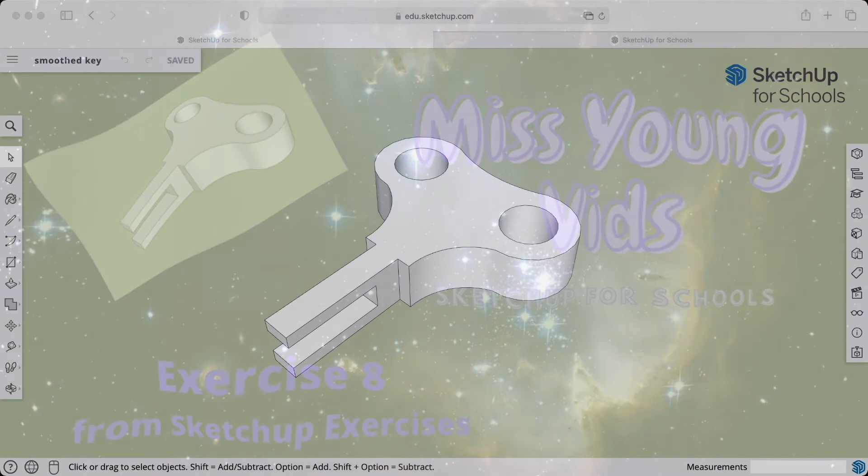In this video we are going to be drawing this shape, which is kind of like a key shape, and there are some really cool things about drawing this shape that we're going to learn. We're going to use some tools we've used before, such as the rectangle, push-pull and tape measure, but we're also going to learn about arcs and using arcs to create different shapes and curves, and we're going to use the smoothing tool to get rid of lines. Where the curves meet, there would normally be a line, but we're going to smooth that out so we don't see it anymore, and we'll do that up around here as well. So this is the shape we're going to be drawing.

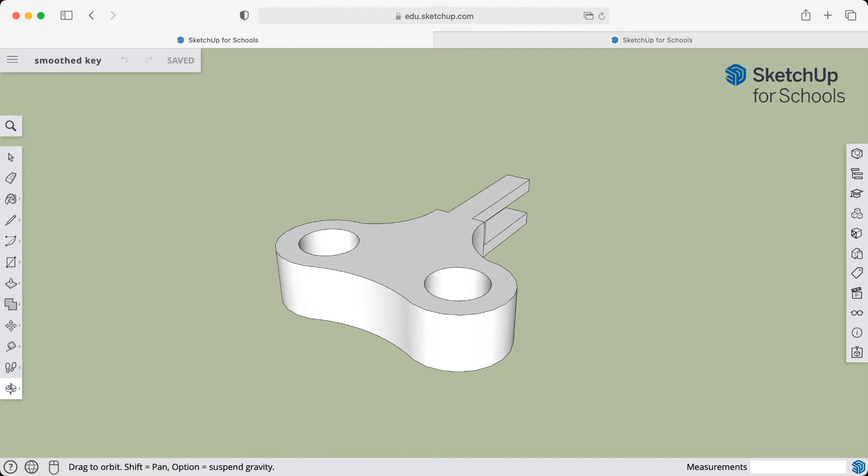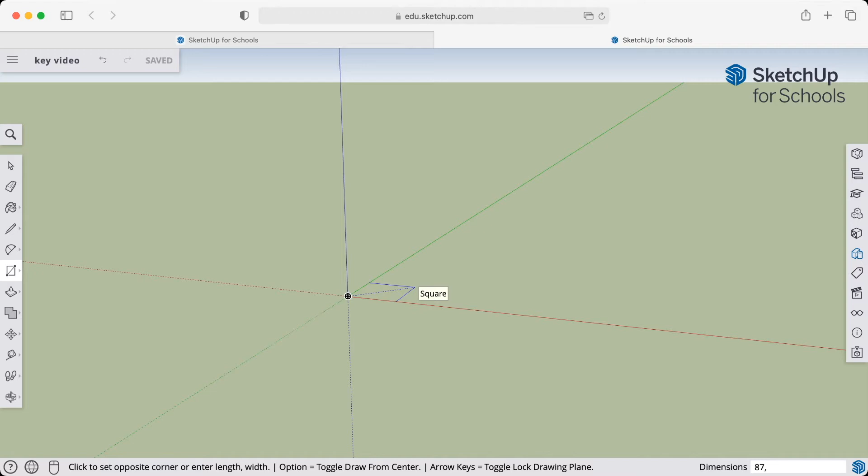I'm going to start with a rectangle, with dimensions of 87 and 50. So I'm just going to draw that out - 87, 50. I've already zoomed in, probably a little too far, so let's zoom out again and swing around.

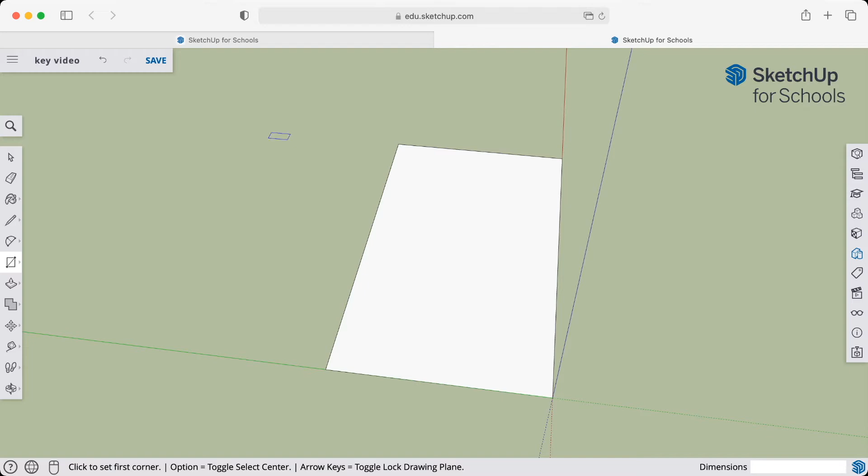So now we've got our rectangle. At the one end, I'm just going to choose this end up here. We're going to add the curvy bits of our key, and we're going to use a brand new tool, one we haven't used in any of our videos before - the arcs tool. So one of the arc tools.

So we have up here just a general arc tool. We have a 2-point arc, which we will use eventually as well. The 3-point arc, which we're not going to use today. And the pie - now the pie is the one we're going to use first.

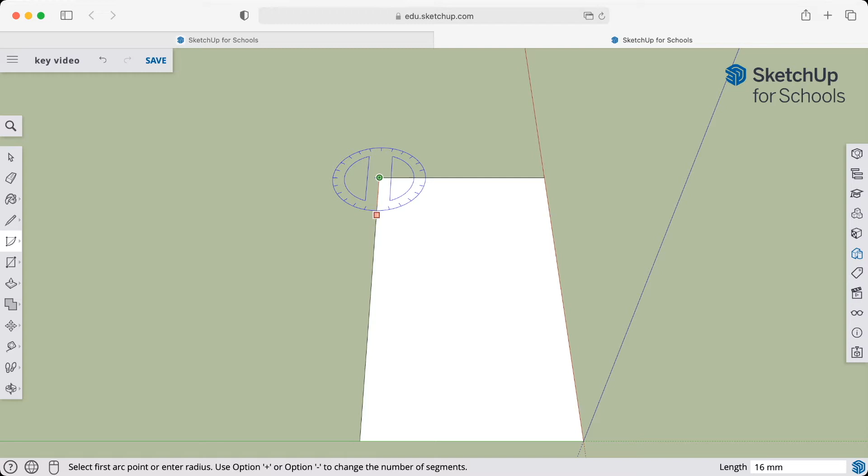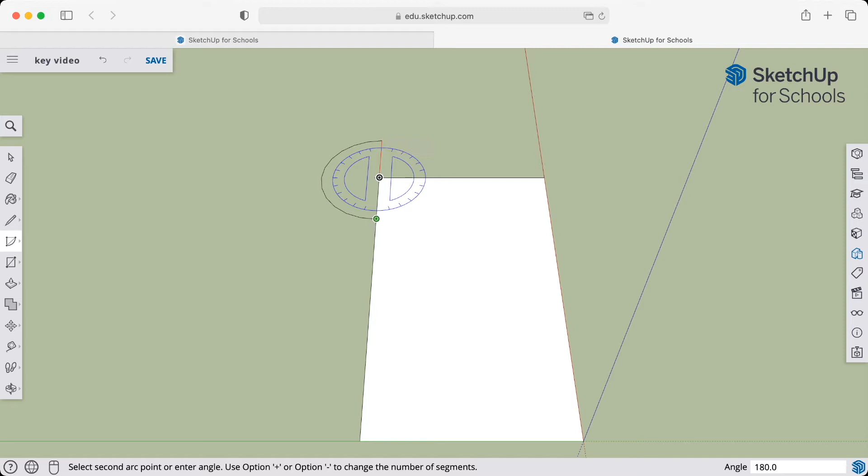So I'm going to click that, and over here on the corner, I'm going to click once to set it. I'm going to bring it down here. Now I need this to have a radius of 17.5, so I'll type in 17.5 and hit enter, and then drag it around. Now I don't want to go straight up because that's 180 degrees - I actually just want to go one section on that protractor further than that. So there's 180 degrees, you can see I'm lined up with the red axis, I want to go one further in, and it fills it in just nicely. So this is the pie.

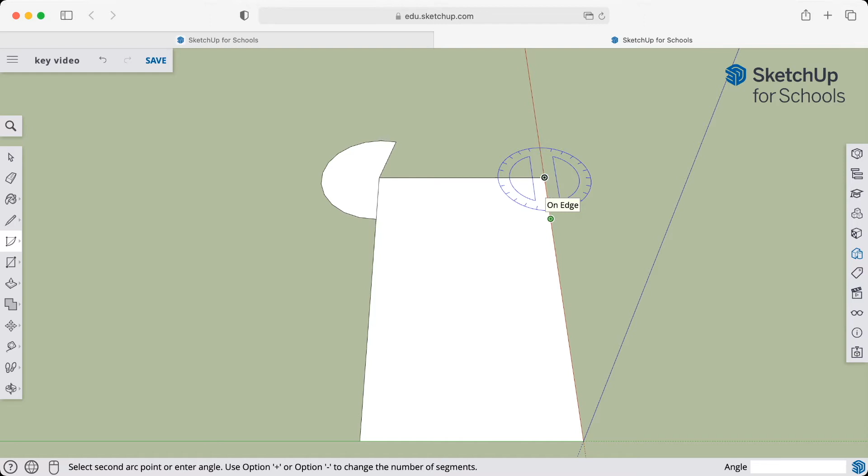I'm going to do that on the other side as well. So again, just clicking on that corner, drag down 17.5, enter, drag that around, one past the 180 degrees. Now we've got something that looks kind of like bull's horns - okay, that's exactly what we want to get started.

And now we've used a different arc tool - that's the pie arc tool. You can set how big you want the radius for that one, and then you can set angles and use the protractor if you need to.

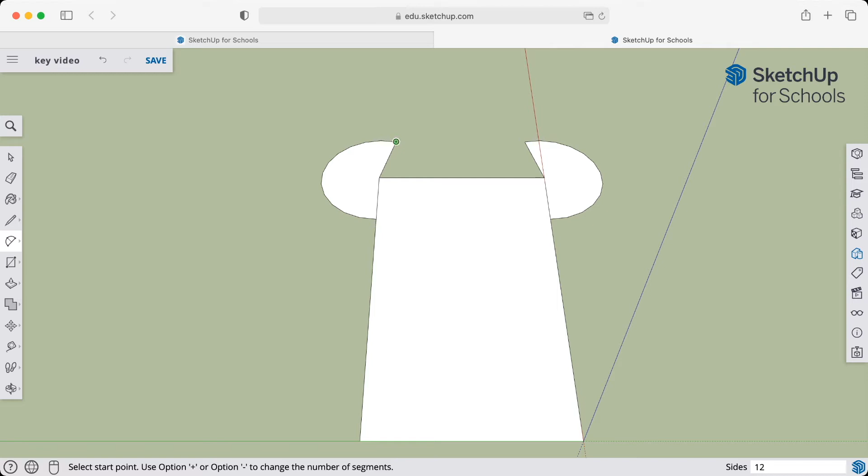But now I need to add this little curve up here that goes the opposite way to the other two. So for this one, I'm going to use my 2-point arc, and there's a little trick with the 2-point arc. I'm going to click on this end, click on that end, come to the middle and drag it down a little bit and click, and you can see that's filled that in nicely.

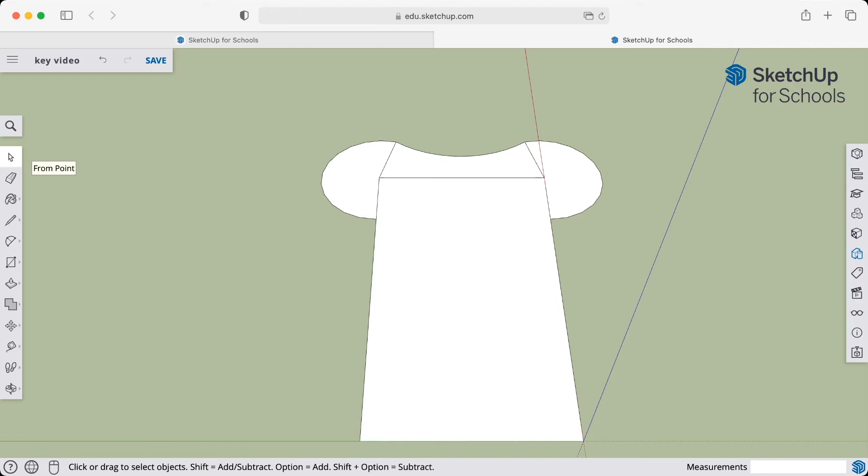But I actually want a particular measurement for this arc - I want a particular radius, and I want that radius to be 50. So I'm going to get my cursor to select that arc, and hopefully you can see it's gone blue. If I select the line, it goes blue. I want that blue, then entity info, and you can see this particular arc has a radius of 33 millimeters. Well, I don't want it to be 33 millimeters, I want it to be 50. So I'm going to type in 50 and hit enter, and you can see it actually changed how the arc looks.

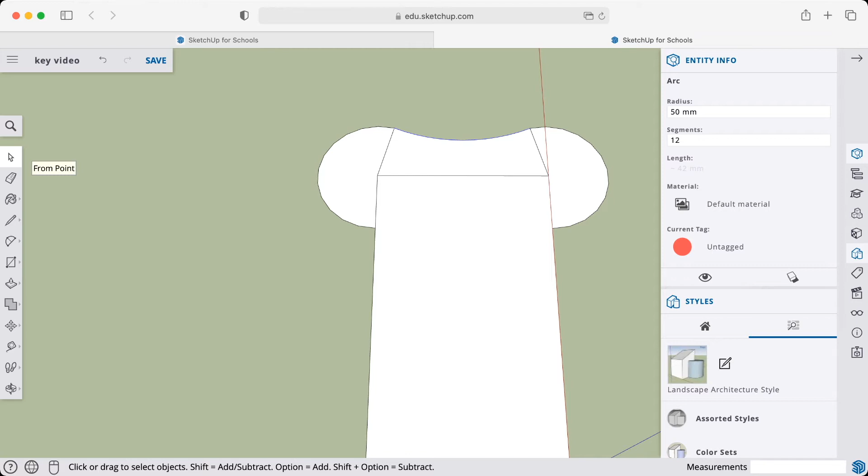We're not currently worrying about how many segments, but we are worrying about that radius. So now I've got that arc in there, and I'm going to get rid of all the extra bits of line that I don't need anymore.

So that's the top part of my key, pretty well done. Now to focus on this bottom end, down here. You can see we've got some curves, a lip there, and a section that's a bit missing. So let's get in and do this one.

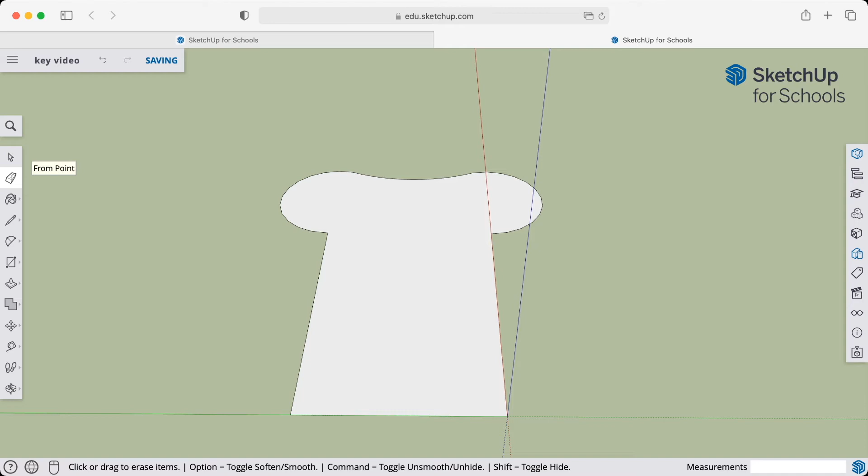Alrighty, measuring tape. Down here I want a section dead center that is 10 millimeters wide. I'm going to come across here, and take 10 off 50 because that's how wide this rectangle is. Take 10 off 50, I get 40. Split that difference, I get 20. So the two edges need to be 20 in.

And then I can either come from this corner and do 20, or I can just go from that guide point and go 10. So from there to there, we've got 10, and from there to there, we've got 20 again.

Now, in to here, where that little lip was, is 45. So I want to go from one of the corners up 45. And I've got my guide points. Now, don't worry about those guide points. We are going to get rid of those later on, right when we're finished, and we don't need them anymore. But for now, we can have them in there.

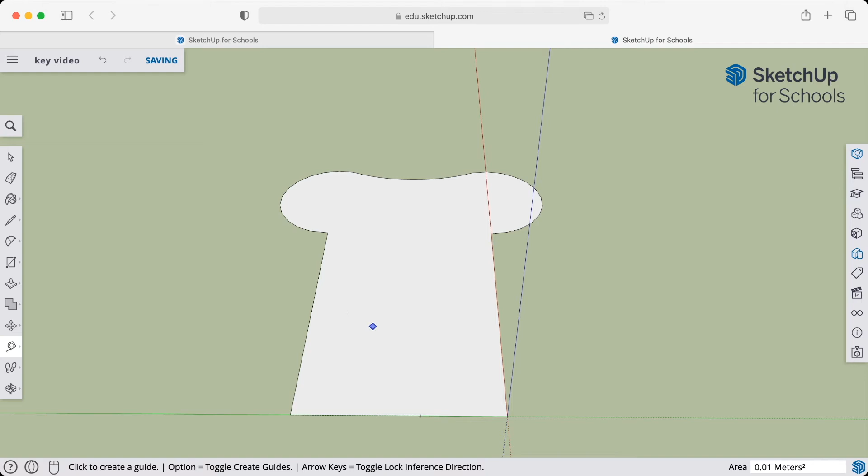They're very helpful. Get my pencil tool so I can draw a line. I'm going to keep this on the green axis to keep it perpendicular. Then these bad boys will stay on the red axis for the same reason.

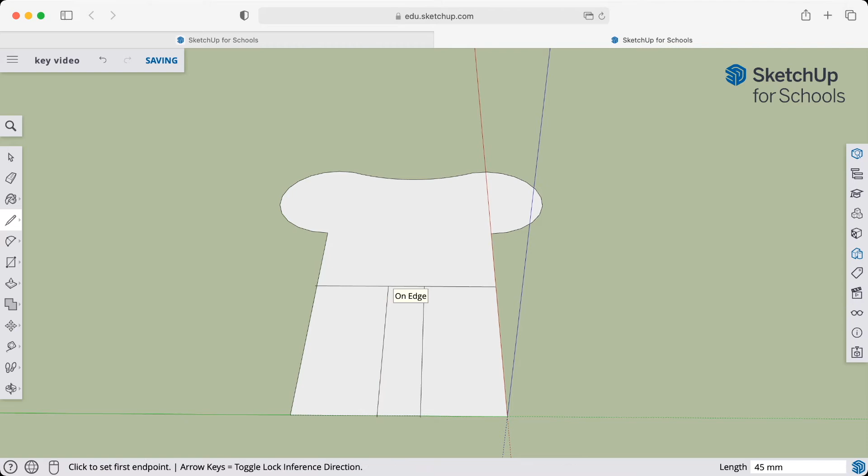And then I don't need any of that anymore, so I can get rid of those lines. I can also get rid of this bit in here. Next bit, we need to get the arc that comes into here, but we also need the lip.

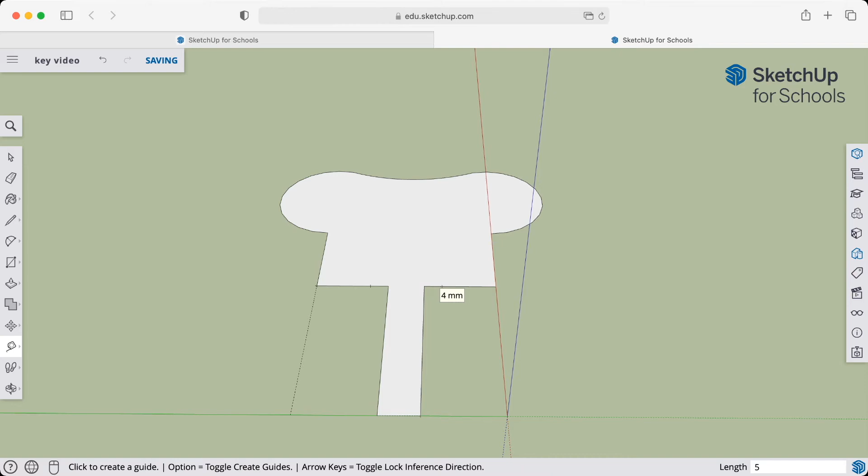Now the lip will come 5 mil off the corners here. So that'll be 5, and this one will be 5. So the actual width of the lip from one side to the other will be 20. We just go 5 out, and then we've got that 10 in the middle.

Alright, we're going to use that 2-point arc again. So another chance to use the 2-point arc, seeing it there. And the points are going to be this corner and the guide point. So I'm going to go corner, guide point in.

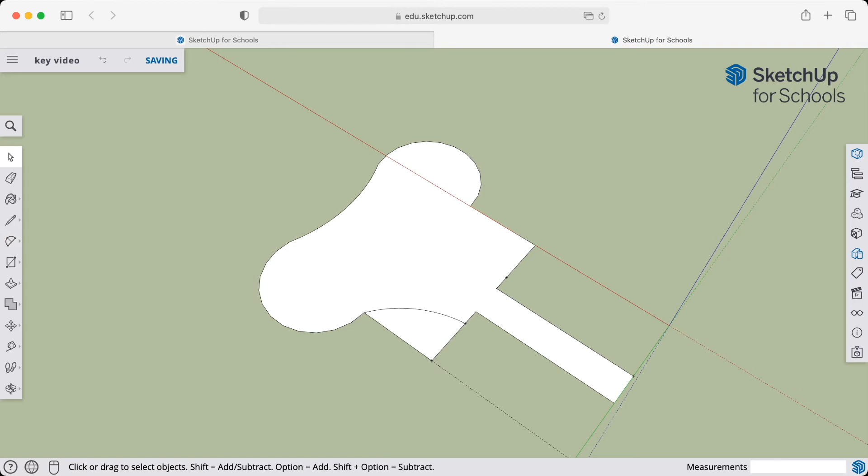I'm going to select that arc, entity info, and for these ones I want these ones to have a radius of 25. And you can see how it changes that arc.

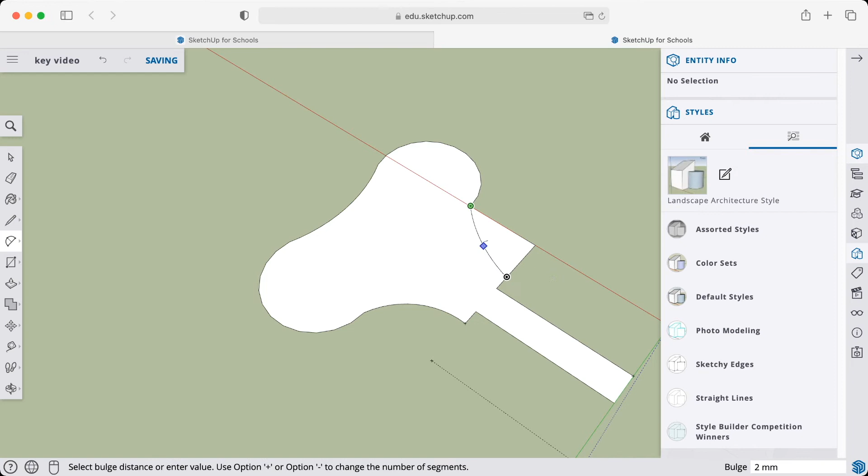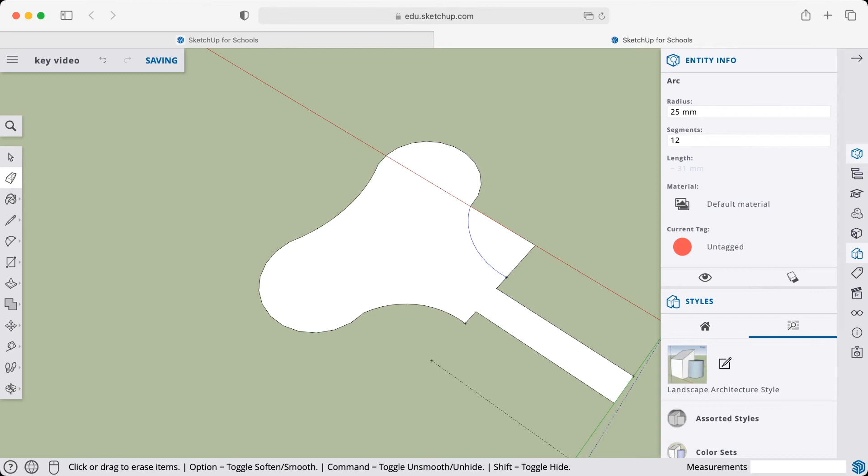I can get rid of the excess bits, and I can do it the same on the other side. Corner, guide point, pull in, select, change that to 25. Remove the unwanted sections.

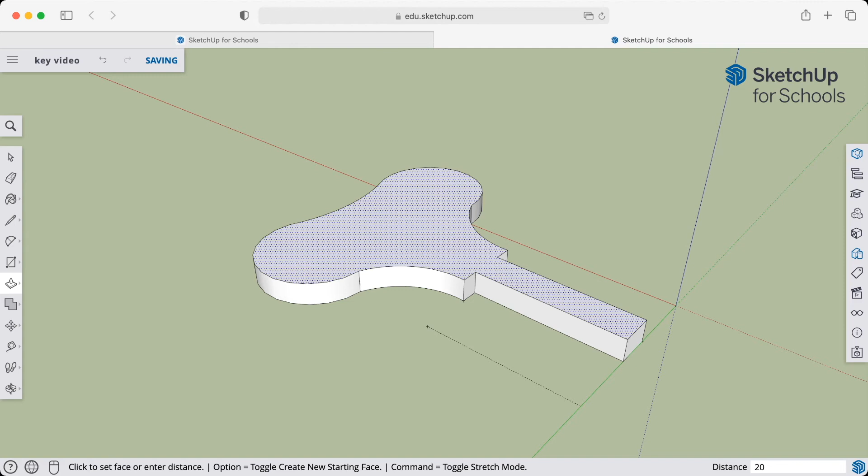Now I want the thickness of my key to be 20 mil. So back to the old push-pull. Drag that up 20. And we've got a pretty good looking key starting to form.

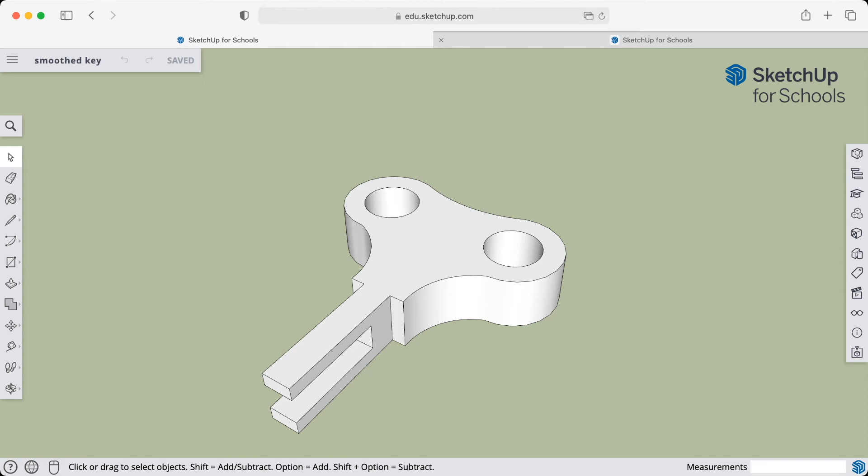So we've got our thickness. We've got the top bit pretty well in. All we have to do now is create this gap, and then our circles there, our holes, and we'll be done, except for getting rid of the guides and smoothing things out. So you can see there's that line. There's no line in this one.

Now the gap is 10 mils, but this is 20. So if I go up 5, and then go up another 10 - so I go up 5, and then up from that guide point 10 - and then it's only 35 deep, that gap.

So again, we're going to follow those axes. This time we're going to follow the blue axis and the red axis.

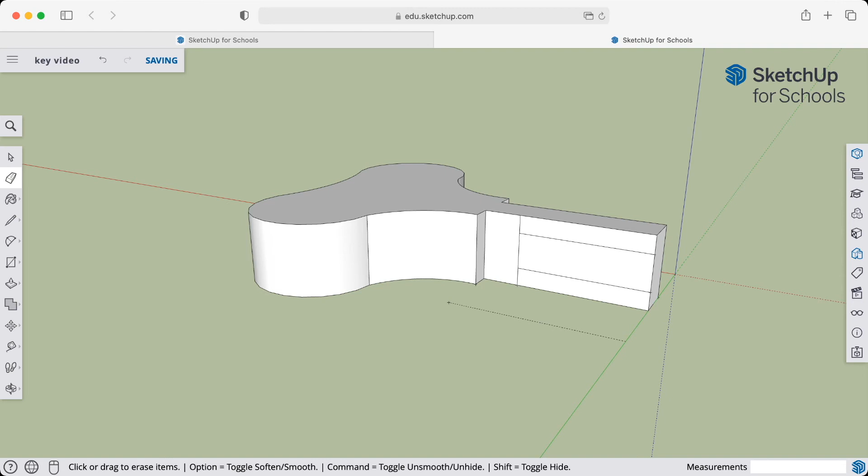Get rid of any additional lines. And then, as we've done in previous videos, push in, click on the edge, and we don't have that section in there anymore. We've got our gap, and the gap's in there really nicely.

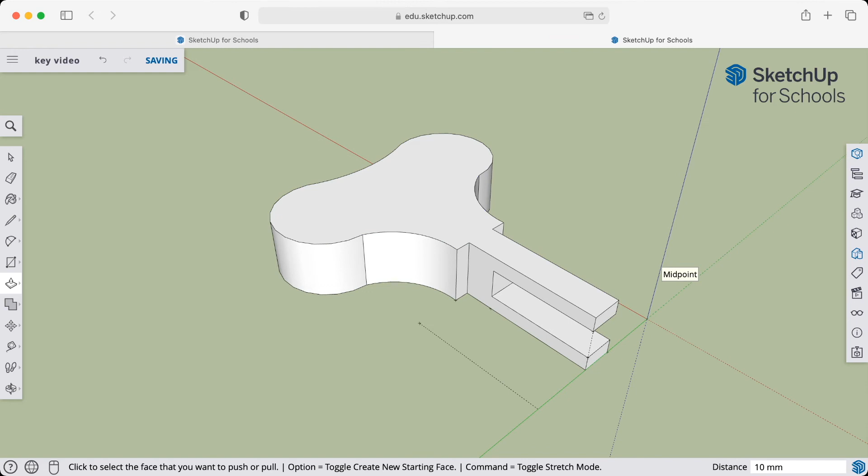Now for the circles, the holes up here, I'm not going to draw any guidelines to find the center this time. I'm actually going to use inferencing, which is where SketchUp will essentially guess what we want it to do.

So I'm going to get my circle tool and just sit it on the edge here of the big arc. Then if I drag in, it snaps to the center of that circle, telling me exactly where I want the center of my next circle to be, which is a radius of 10.

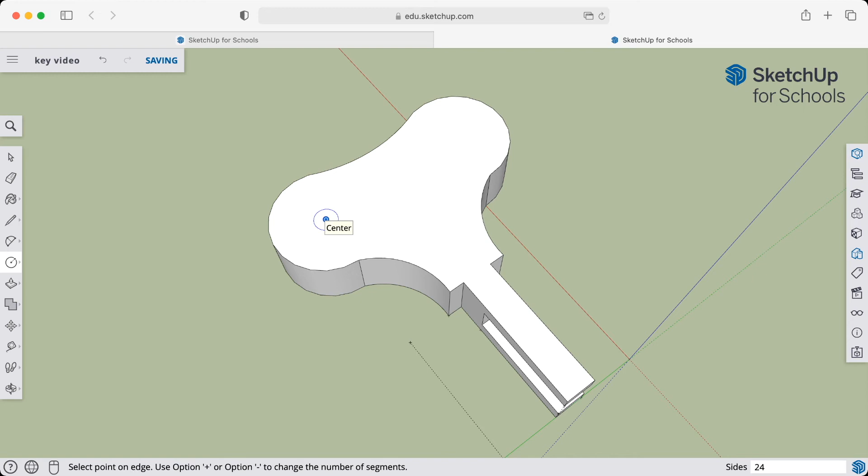And there it is. I didn't have to draw any guidelines for this one, and I don't have to erase any extra bits and pieces, just by using the inferencing. I can do the same over here - just on the edge, anywhere on the edge, drag in towards where you think the center is, and it'll snap there for you.

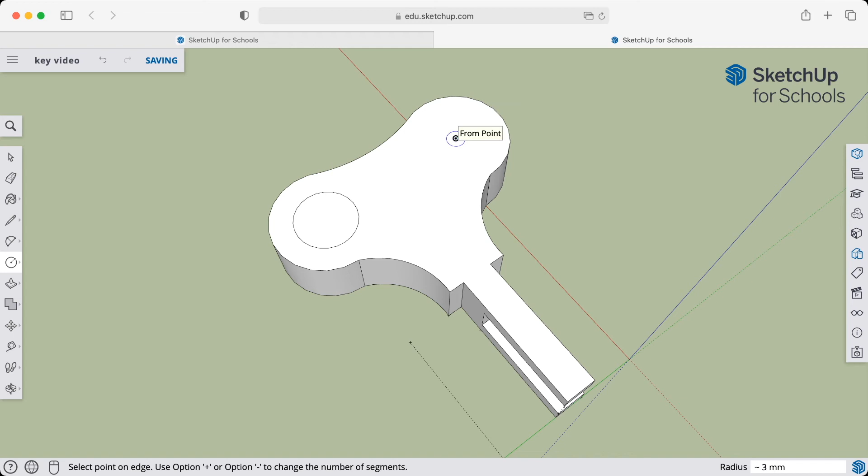There's my two holes. Oops, don't need the eraser, I need the push-pull. Snap that to the edge, snap to the edge, and there I have the holes of my keys.

So let's smooth our surface out. To smooth the surface, I'm going to use my eraser tool. Now you'll look at the eraser tool there, and you can see that it looks like a normal eraser. It's got that little circle on the end because that's going to be targeting what you want it to see.

Now if I just use that eraser on that line, it actually removes the section, and you can now see inside that shape. But I don't want to remove the section, I just want to remove the line. So if I use my modify key - on my Mac it is the Option key, you can actually see the instruction down here. Option. On a PC it is the Control key.

Now sometimes you will actually see an additional thing on there. Once I've toggled that, I can smooth the edges, and it's telling me here that I can smooth the edges, and I just get rid of that.

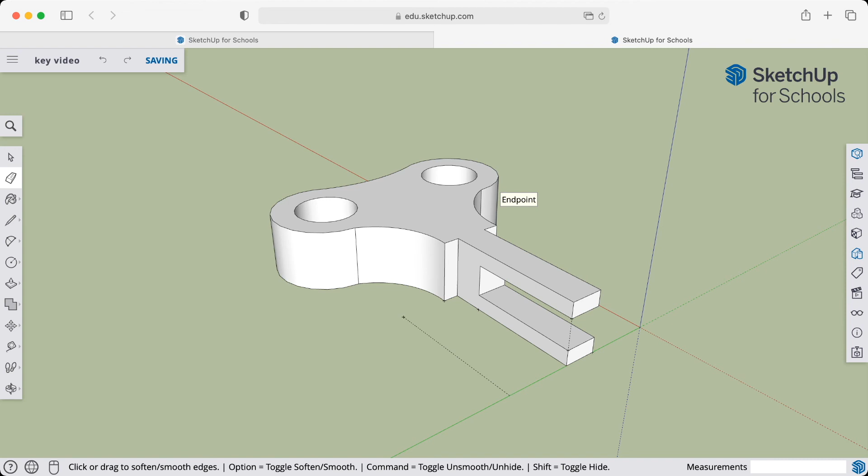So I'll show you that one more time. Here I'm just erasing things. I use my modifier, and now I can smooth the edges. So I click on there and there's no line there anymore - it's nice and smooth.

Do the same over here, and you can see that my eraser tool has changed a little bit. There's that little accent across it telling me that I'm smoothing edges. Okay, so there's all the edges I had to smooth out.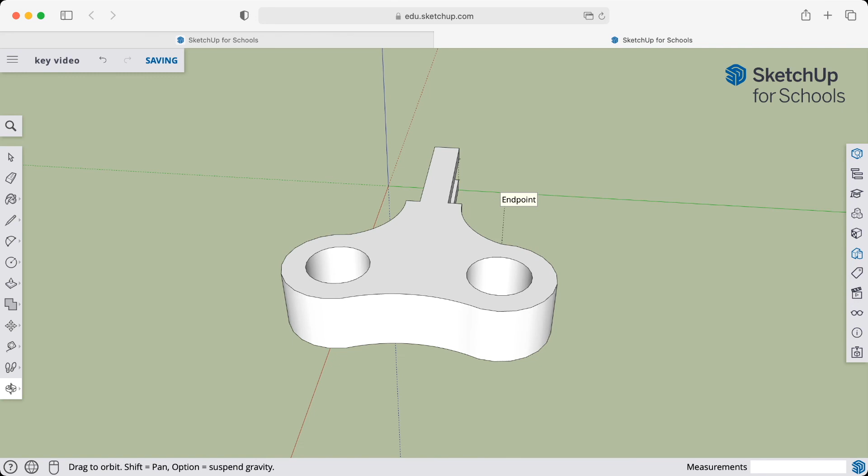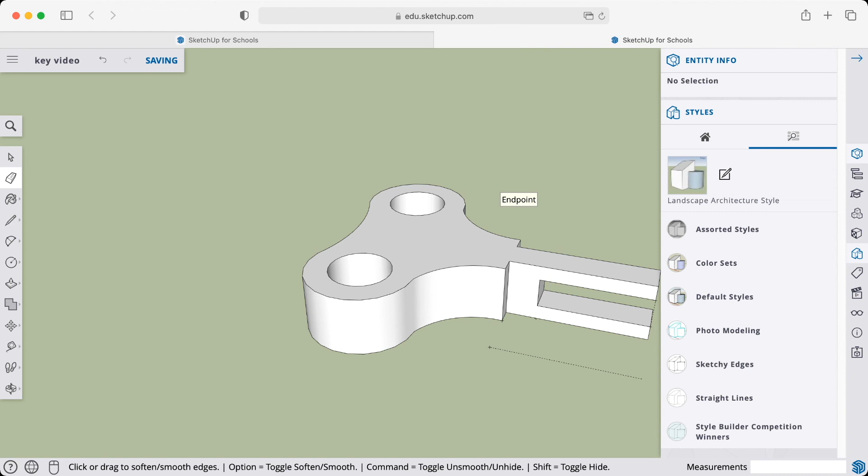Now I just want to get rid of the guides. I might get rid of the axes first so it looks a little bit nicer. So here, model settings, model axes. Now I can just hide the guides, but I actually want to delete these, so I'm going to go to the glasses, and there's our delete all guides. And you can see they've all disappeared now. And there we have it, all done.

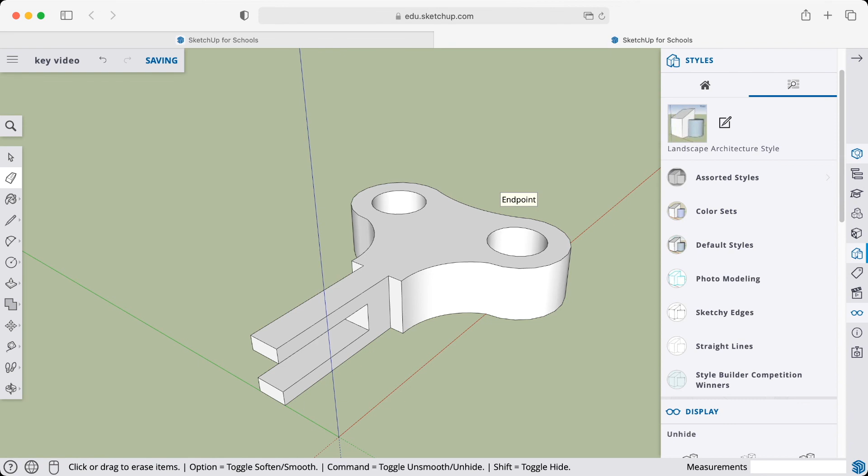Now, I haven't actually gotten rid of those axes properly. One thing that you do need to remember to do when you are using the styles is click done, and then it'll save them for you.

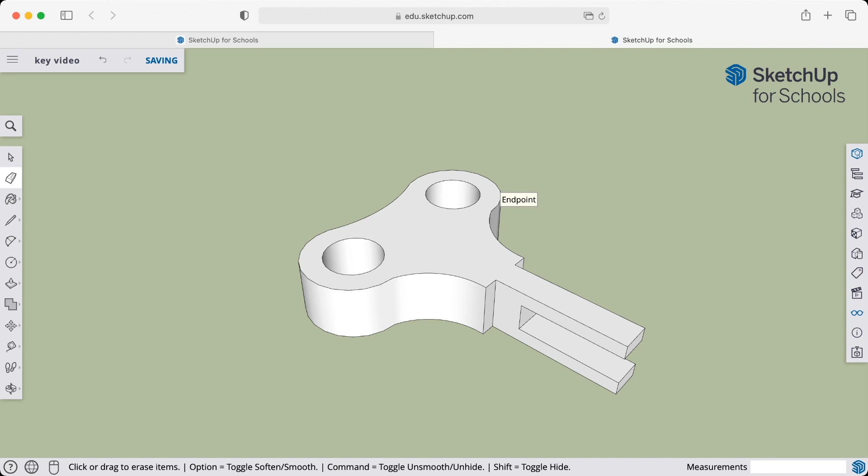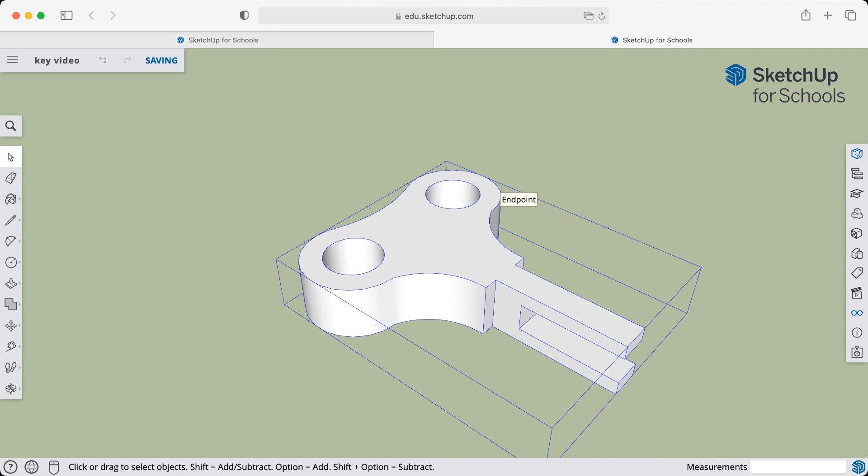Now, one last thing that I'm going to do, just in case I want to 3D print this, is select the whole thing. Entity info - no, it's not entity info, I actually want to right click and make group. Alright, I'll do that one more time. So we want to select everything, make group, and then that's all one thing and we'll be pretty well set.